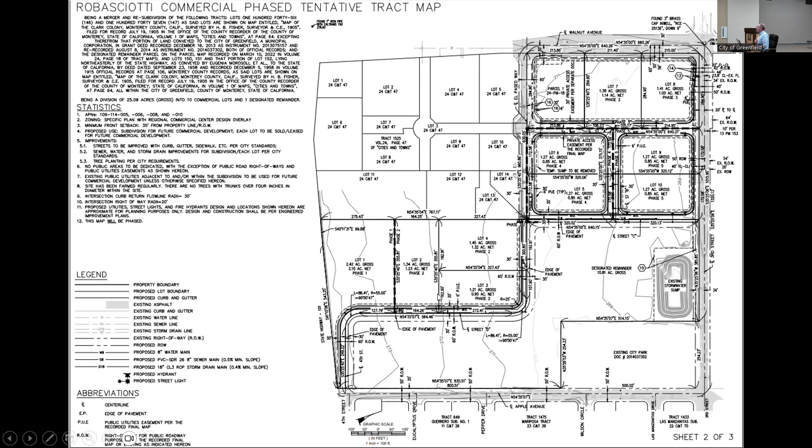The goal is to have 10 parcels and then one remainder parcel, which would most likely be used for residential purposes on the south, near Apple Avenue next to the park and south of where that road is going to be. So you have two parcels fronting Walnut up here, 4 parcels in this zone right here, and then you've got 4 more parcels, one fronting the freeway, and these 3 interior parcels. Left over, that would be for future residential development at some point.

So in order to do that, they have 4 existing parcels. Technically, they will be merging the parcels and then subdividing the parcels in accordance with the map.

We've talked about the Walnut Avenue specific plan many times over the years. Those of you that have been on the commission for some time know it was adopted and has now reached its 10-year anniversary. The EIR has been certified, and really that plan guides the development of commercial growth, high density residential, the recreation open space, and all the supporting infrastructure that goes with it.

That's important when we talk about this map broken up into numerous parcels. It has all the standards, the circulation plan, and it's a flexible plan, as we move along, as development occurs, as changes happen in the economy, compared to what the city was looking for 10, 15 years ago.

Retail has changed a lot. Life pre-COVID and well before that, everything was, let's get big boxes built in. Well, big boxes aren't developing anymore. That's just not the model, because you can buy everything online, and stores are shrinking in size.

We have this issue with retail shrinking all over the place, with malls having issues, with department stores, everything getting smaller because of e-commerce. So you have to modify what you're going to do. Where it's still strategic to build, you still do that. There are plenty of places that are underutilized with commercial development, and all of South County fits that description. We talked about this before. So there are opportunities, but they're going to be very focused opportunities with companies looking to locate or expand their business. But typically the footprints are smaller than we used to see 15, 20 years ago, just because of how the economy works and people being more comfortable buying pretty much anything online.

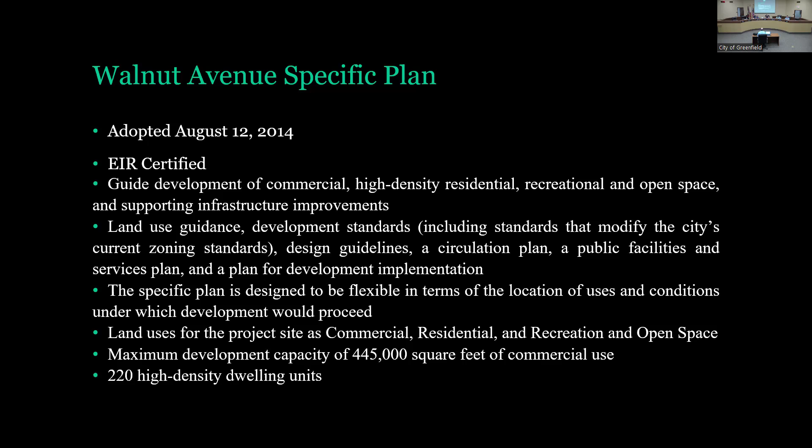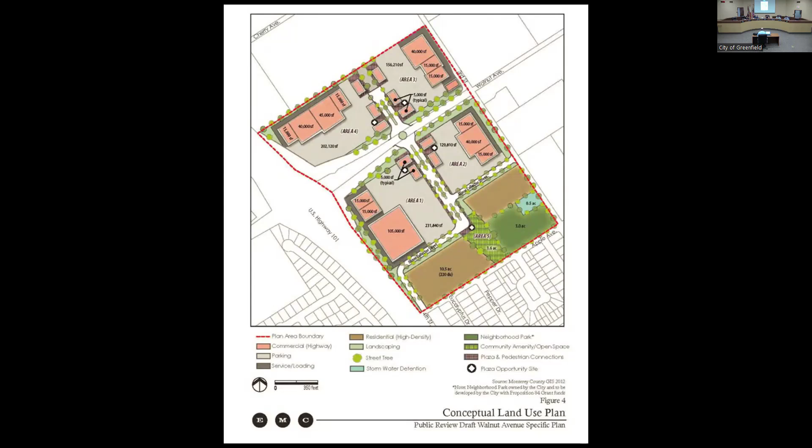The development standards you're looking at in terms of evaluating this proposal, remember, this is primarily a highway commercial project. So the biggest issue I'd put on here for your consideration today is that by splitting up the parcels into smaller bits, it does kind of limit your development to smaller projects. Now, someone could eventually buy 2 or 3 parcels, put them back together again and build a bigger building, but smaller parcels are generally going to yield smaller buildings.

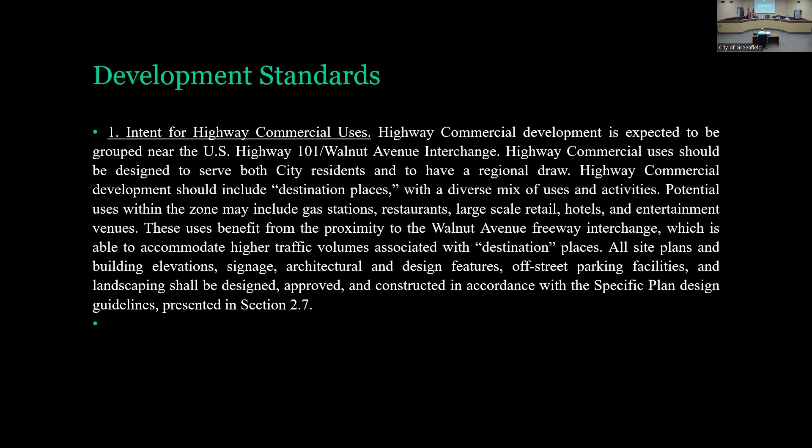The table of development standards is in your specific plan. The biggest thing to look at for this requirement is you have to have a minimum lot size of 10,000 square feet. Every lot is well above that - I think the minimum is 1 acre, and it goes up to 2.5.

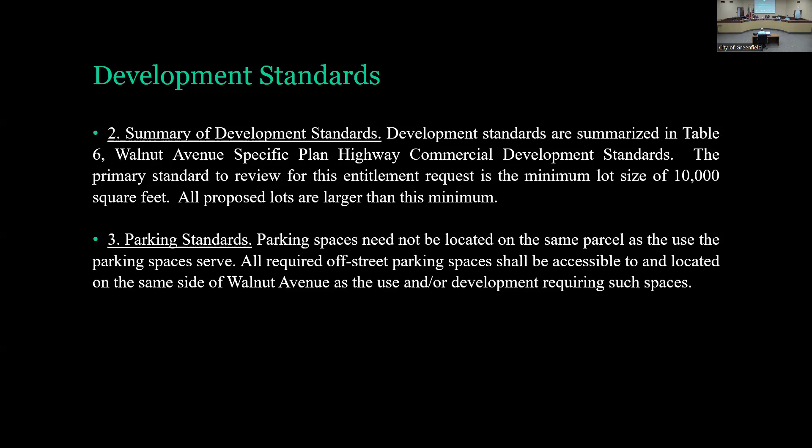Parking. One thing about the Walnut Avenue specific plan is the concept of shared parking, so that parking can be transferred across parcels. But this is something you'll have to look at on a case-by-case basis when you get projects in front of you. Every commercial project in the city of Greenfield is subject to planning commission design review.

Whether it's a permitted use or it needs a use permit, you will see every project that comes across. Of course, future projects need to comply with all these things shown on the screen: landscaping, signs, etc. Today, we are not looking at any uses. I know we'd love to bring more projects to you with uses on them, but those will be determined at a future time. Obviously, those uses need to be consistent with the Walnut Avenue specific plan and the land use table. As I mentioned, design review will be required at a future point.

It's really important to note here. The biggest concern for us as we move forward looking at a project like this is: when you have one developer and one piece of property, typically all the improvements get done at the same time. When you break it up into lots of pieces, how do you make sure the improvements get done? The pipes, the roads, everything.

If you split it up into 10 parcels and someone wants the parcel in the middle, how do you make sure that they have access to water, sewer, and road? It doesn't make sense to develop a parcel in the middle without developing the roads on the edges first. So there's a detailed phasing plan in the conditions of approval that outlines what's required for each individual parcel on a parcel-by-parcel basis.

So the requirements, for example, for the parcel at the corner of Walnut and Third require certain widening and relocation of that traffic light, consistent with the specific plan, which are different than the requirements, say, for the parcel next to the freeway that's adjacent to Apple Avenue, or not off of Apple, but off of that road that will extend off of Apple Avenue.

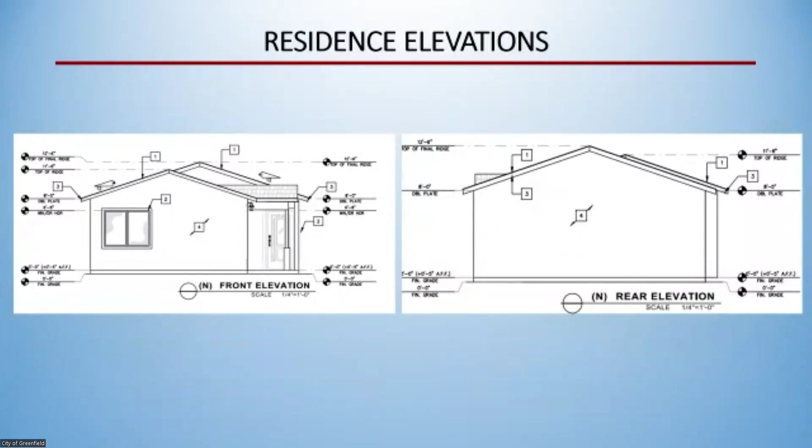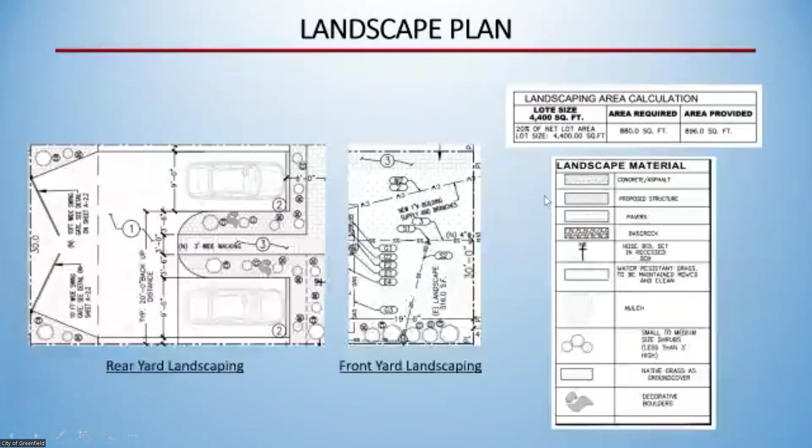Some things to consider: as I mentioned, the narrowness of this property does require a setback variance. 45 feet is a pretty large setback, and currently their setbacks range from 3 feet at the east side of the property up to at most 8 feet at the west side. So clearly they would be requesting this variance to meet that setback requirement.

Another thing to consider is that the project does not meet the covered parking requirements. From the beginning, the applicant has worked really hard to try and come up with a parking arrangement that allows for more parking. When the project originally came in, it had 3 parking spaces, but due to the narrowness of the lot, it didn't allow for vehicles to turn out safely, which is when they came back with 2 spaces that made exiting into the alley a lot safer for the residents there.

We do recognize that parking is an issue, and I'm sure ideally, if this was a larger lot, we would of course be requiring the 4 parking spaces, but given the narrowness it would be very difficult for them to meet those requirements, which is why they are requesting this variance as well.

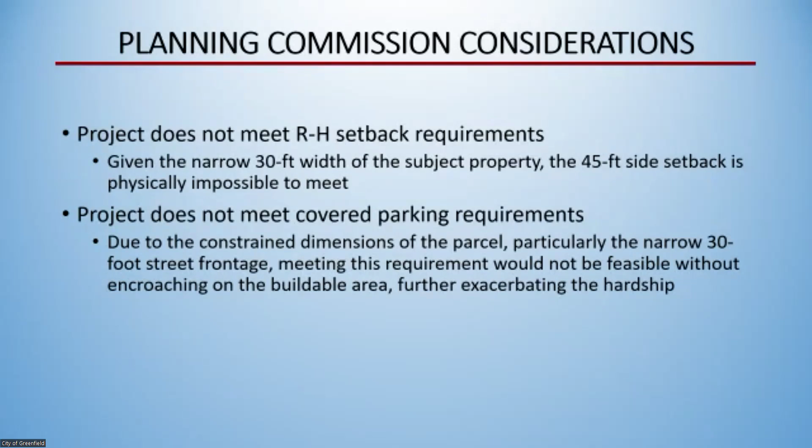The project does not require a CEQA review, and it is our recommendation that the commission adopt this resolution to approve the variance for the setbacks and parking requirements of section 17.30.040 and 17.58.050 of the municipal code, and approve the design review for the construction and remodel of a single family residence and ADU at 717 Oak Avenue, subject to the conditions of approval.

So if you have any questions for me, I'm happy to answer them. And like I said, the owner of the property is on Zoom, I'm sure he's happy to answer any questions.

I did go on, can you go back to the map with the site plan, or no, where the alley is, where I can see the alley, that one. So I did drive by on Ann Scott Drive. Where's the alley? Unless, is that the alley? Yeah, so it's called Ann Scott Drive, but essentially it's the alley. Okay, so yeah, that's very narrow.

I went in there and there was a car parked at the other end of Ann Scott Drive, and I had to reverse back because it was blocking it. I wasn't able to pass. So, yeah, I guess that's always our concern, the whole parking situation. But yeah, I mean, if it's going to upgrade the house and the property, and given the location, yeah, I'm all for it.

So there's no way that, right, with the two parking spots, that's the only way that makes it work. Yeah, it really is. They tried the 90-degree parking stalls and it's just kind of impossible for the cars to back out. So the only way really is the layout that was chosen. And I think trying to fit more cars in there probably wouldn't be a great idea, because like you said, it is a very narrow alley.

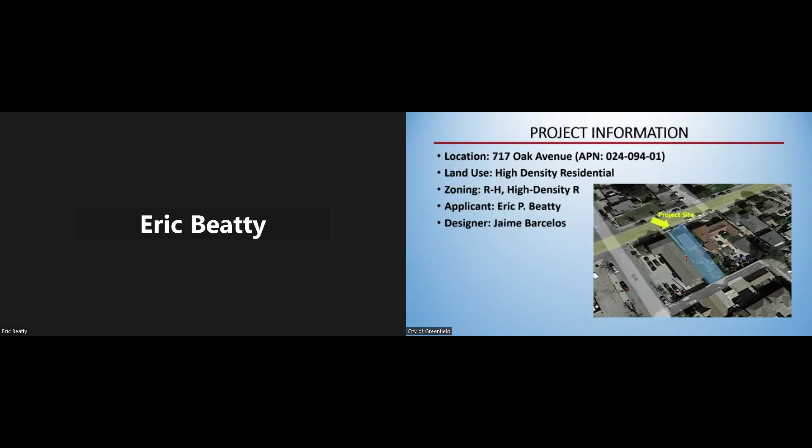Largely because of the very tight side access from the existing home. It would make more sense to add on to it slightly, moving toward the alley, and then have a larger—not wider, but longer—second unit attached closer to the alley. So we would make minimal changes to the existing layout, since it's so tight on the lot and the lot is so narrow. We can only really go in one direction, and from a feasibility standpoint, the most cost-effective approach is to keep the existing home as close to its existing layout as possible, use as much of the existing construction as we can, and make the back home effectively the addition. The second home would now become the main home. So it's a cost issue, and because of the very narrow lot dimension.

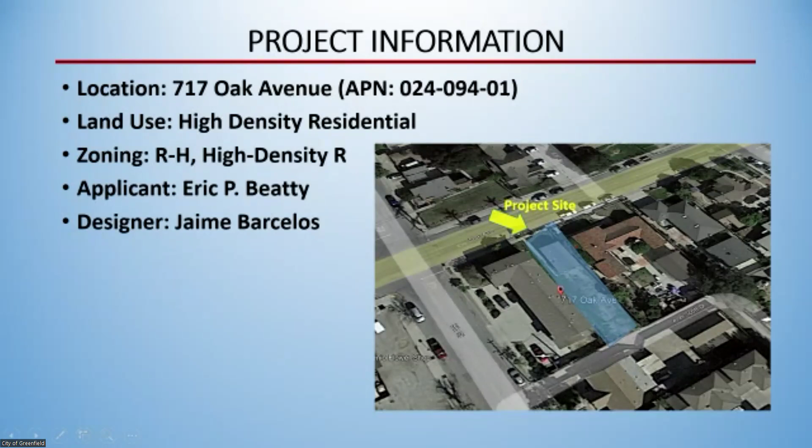Okay. Thank you. Can I see the view from Oak?

And you said the fencing's going to change, right? So we have a 3-foot fence in the front and then a 6-foot fence on the side and rear with a gate in the back.

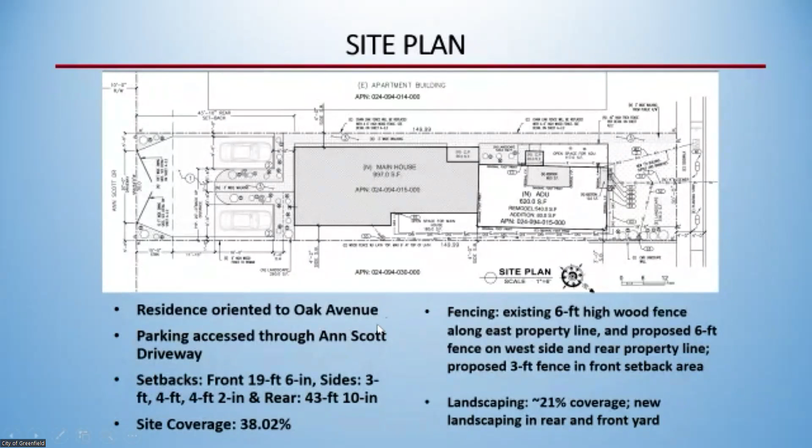And there's no entrance, correct? Can I see the layout, so there's no entrance from Oak to the home? It has to be in the back. There's both entrances, I believe, right through the side here. We see this is the ADU entrance, and then this is the main home entrance right here. So I guess this one's sort of at the front.

So how many cars can fit in there then? Just two? Yeah, just the two. Well, what about the main house? And then you have the ADU. How many people can live in there? There could be more than 2 cars. Yeah, so the 2 spaces are essentially for the main home, and the variance is to relieve them with the other 2, but the ADU is exempt from parking under the state mandate, the state ADU law.

That's all I got. Anyone else? Maybe they'll have motorcycles, in response. Okay, all right, well thank you for that.

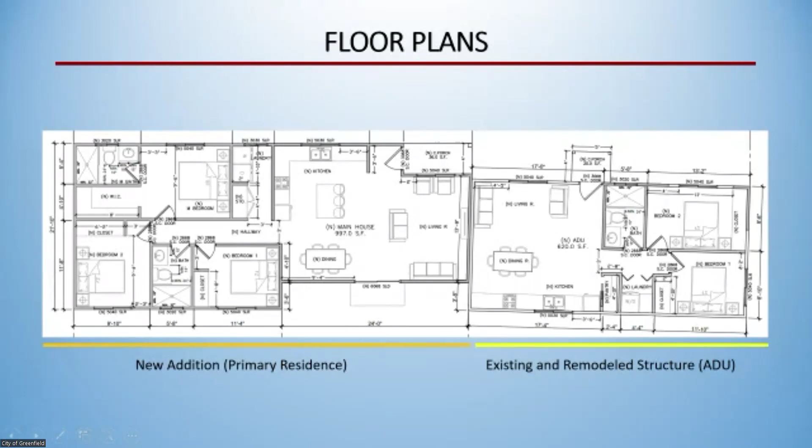I'm going to go ahead, there's a proposed motion on page 39. I move that the Planning Commission of the City of Greenfield adopt Resolution Number 2024-03, approving a variance for the setbacks and parking requirements of Sections 17.30.040 and 17.58.050 of the municipal code, and design review approval for the construction and remodel of a single-family residence and accessory dwelling unit at 717 Oak Avenue.

Second. I'll second it. Everyone in favor? Aye. Thank you. Thank you.

All right, we're going to move on to number 3. Consideration of a resolution recommending to the city council adoption of a rental registry ordinance as an amendment to Chapter 17 for the purpose of regulating the city's rental housing stock.

Staff report. Good evening, Madam Chair, members of the Planning Commission. I'd like to recommend that this matter be continued, because I was unable to get the reports done on time for review by both the city attorney and staff. If the Planning Commission agrees, the best thing to do would be to continue this to a date certain, which would be July 2nd. That would allow us to not renotice the project.